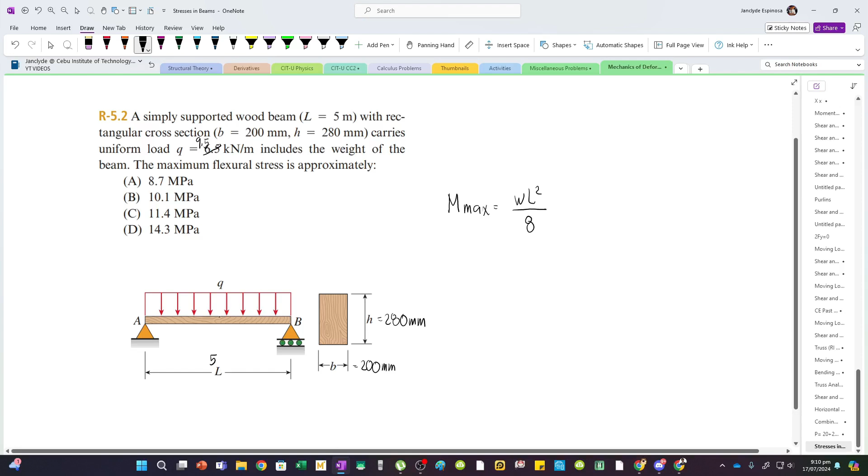And then our beam section is 200 and this is 280, and the length is 5 meters. So let's apply the formula.

For the maximum flexural stress or bending stress, we have MC over I, where C is the farthest distance from the neutral axis. So therefore we have FB equals, our W is 9.5 kN per m.

So 9.5 kN per m, multiplied by L squared, which is 5 meters squared, divided by 8. This is in meters. Now notice that the m units cancel, and we are left with kN multiplied by meter. So we have to convert that into Newton mm to keep the units consistent.

And then our C will be the farthest distance from the neutral axis to the outermost fiber. So we have this distance, this is the neutral axis. So this is half of 280, which becomes 140.

So 140, divide that by I, which is BH cubed over 12 for rectangular sections. So 200 times 280 cubed, divide that by 12.

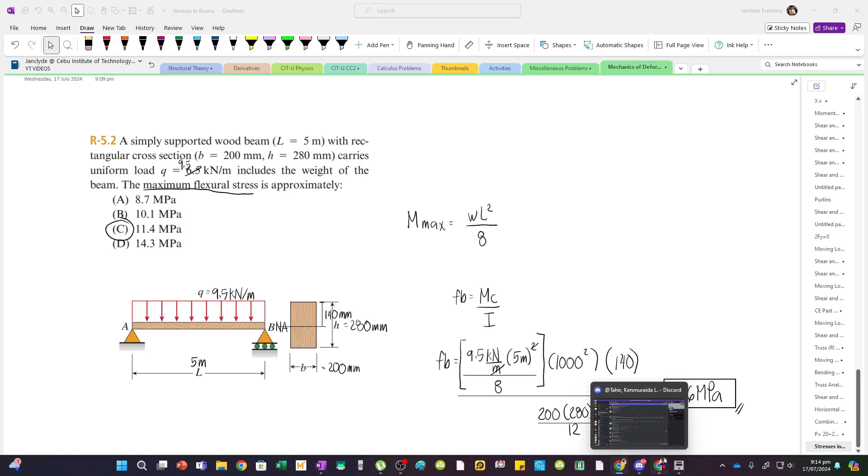Let's use this one instead. Let's copy this. This is the question, and then the figure is this.

So we have a beam, and we also have the beam section. Let's copy that, and also the section. Beam section.

Now in this problem, we have a beam with an overhang loaded by a uniform load of 3 kN per meter. Moment of inertia, good thing it was given so we don't have to solve it: 3.36 times 10 to the 6. And distances to top and bottom of the beam cross-section are 20 mm and 66.4 mm. The centroid of the figure was also given.

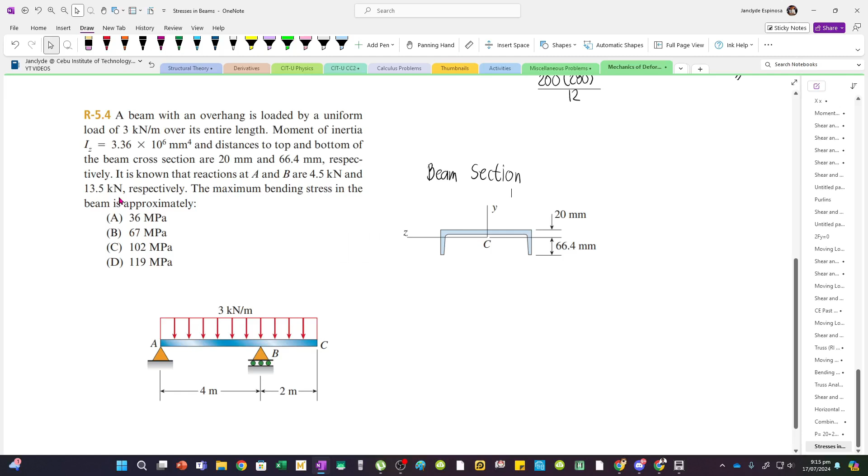And then it is known that the reactions at A and B are 4.5 and 13.5. Good thing that was given too, so it's easy to solve for the shear and bending moments.

So this is the reaction at A, which is 4.5 kN, and then the reaction at B is 13.5. That's convenient too.

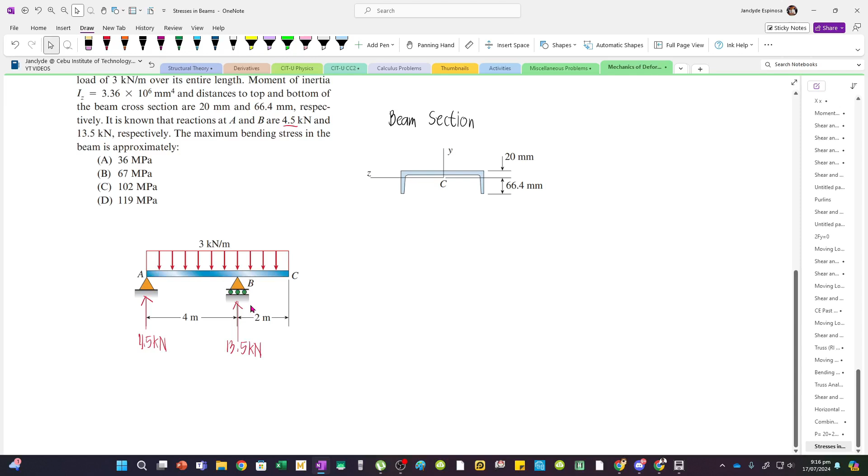Now for the maximum bending stress, you have to be careful because our beam is an overhanging beam, meaning we have a maximum positive moment and also a maximum negative moment. Now let's check that.

So let's draw the shear diagram and moment diagram. For the shear diagram, the units are in kN. So let's draw our zero line, and then from 0, we go up by 4.5. Straight line since this is a concentrated load.

So 4.5. Since there's a concentrated load, we have left and right shear values. This is 0, and VAR is 4.5. And then at point B, there's also a concentrated load of 13.5. So we have VBL and VBR.

Now the left shear value is the previous shear value minus the uniform load spanning A to B. The resultant is, right, 3, that weight, multiplied by 4, which becomes 12.

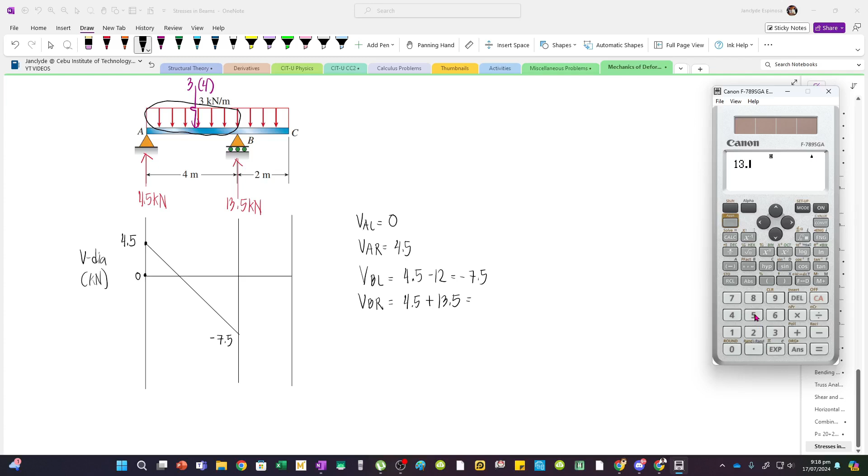What's this, this is VBR. Wait. And for VBR, we add the 13.5 there. So this is now, minus 7.5, sorry, 7.5.

So we have 6, from negative 7.5 we go up to 6. For point C, there's no concentrated load, so we only have one shear value, which is 6, the previous value, minus the resultant of the remaining load. That load has a resultant of 3, the weight multiplied by 2 meters.

So 6 minus 6, it now becomes 0. So it goes down, and we have a straight line because this is negative constant, plus 1 degree. So 1 degree here too, so it becomes 0 here.

Now you don't need to draw the moment diagram. Let's just try to solve the maximum moments just by looking at the figure. At this point, the shear becomes 0, meaning there's a maximum moment there. But also at this point, the diagram crosses the 0 line, meaning there's also a maximum moment there. So let's check that.

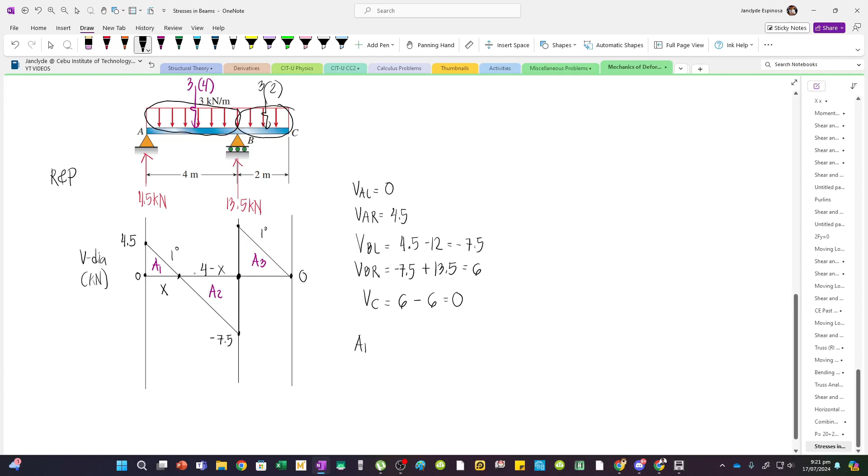So let's label this as area 1, area 2, and area 3. What is area 1? First we have to solve the base of this triangle, which we can solve by ratio and proportion. So this is x, and this is 4 minus x. By ratio and proportion, we have 4.5 is to x equals 7.5 is to 4 minus x.

So let's solve. Equals 7.5 over 4 minus x. So we get 1.5. So if this is 1.5, then this distance is 4 minus 1.5, which is 2.5 meters.

So A1, this is the maximum positive moment. A1 is 1/2 times base of 1.5 multiplied by a height of 4.5. So this is now 0.5 times 1.5 times 4.5, which gives us 3.375 kN-meter.

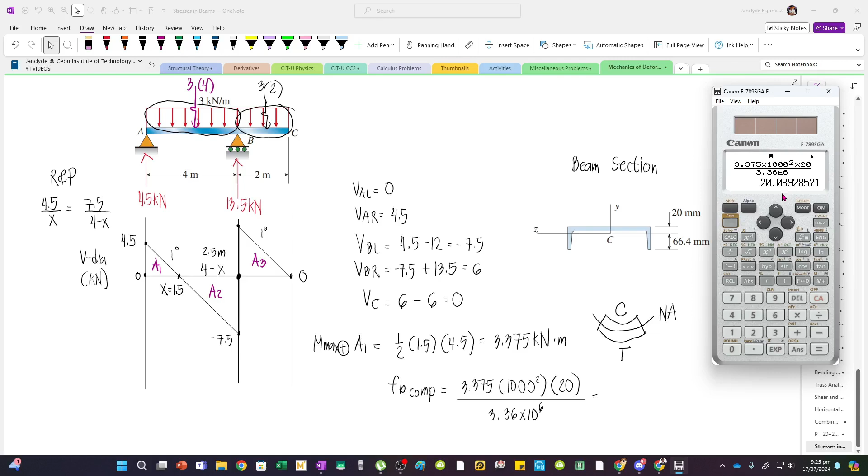Now if I weren't given, you would have to solve it yourself. So let's input that: 3.375 times 1,000 squared times 20 over 3.36, just press EXP. There, the E shows up, meaning that's already times 10, so just pair it with the exponent, 6. That's the 3.36 times 10 to the 6. So press equals, we have 20.089, or let's say 20.1 MPa. Now this is only the first bending stress.

We also have tension, FB tension. Now I can just copy this since only the farthest distance from the neutral axis for the tension side changes. Now tension is at the bottom, so I have to use 66.4 instead, replacing the 20 with 66.4. So solving the maximum bending stress for the tension side, considering the maximum positive moment, we have 66.696, or let's just say it becomes 67.

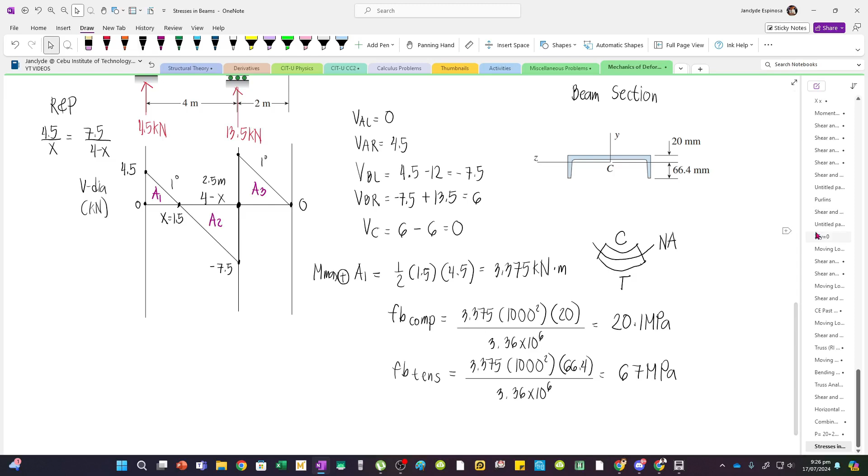So check the choices, there's 67. But you have to be careful here, because this choice is the trap choice, meant to scam you. Why? Aside from the positive maximum moment, there's also a negative maximum moment. Now where do you find that? Whenever you have an overhanging beam with only downward loads, you get a maximum negative moment occurring at the support. But we can check that here.

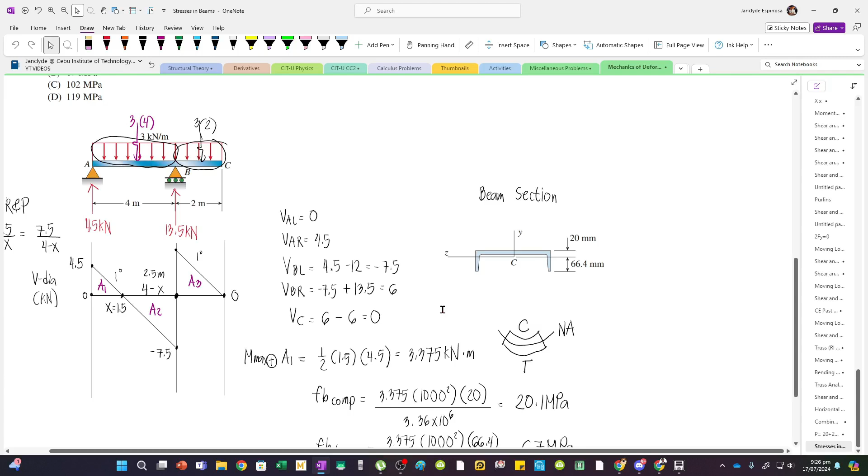There are two ways to solve the maximum negative moment. The first way: let's label this Mmax negative. You can add A1 and A2, since it zeroes out there, so you can use A1 minus A2. A1 is 3.375. Minus A2, which is 1/2 times base of 2.5 multiplied by a height of 7.5. This gives us minus 0.5 times 2.5 times 7.5, which gives us negative 6. This is your first and conventional option.

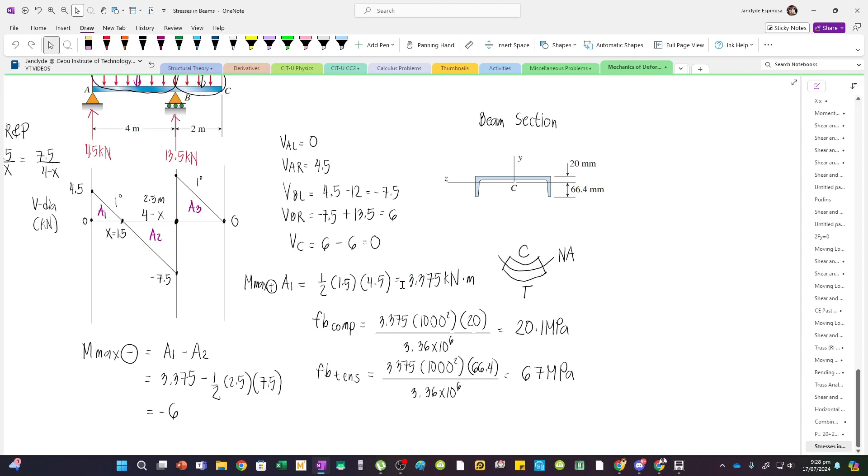But you can also take the area from the right. If you go from the right, the conventions change: a positive area becomes negative, and a negative area becomes positive. So how does that work? I can actually start from the right here, and go to the point where the shear becomes zero. So I can just solve this area. I have here the maximum negative moment, just the area A3. But since that's a positive area, it becomes negative if taken from the right. So let's set it up from the right.

This is now 1/2 times, yung base is 2 meters. Height is 6, yan kanina. So, magka-cancel yung 2. We have a value of 6 kN·m. But this is negative kasi again, there is a change in the convention.

So copy na lang natin yan. The same lang naman yung I. But take note, for negative bending, ito na yung itsura. Sad face na yung beam. And then ito yung neutral axis. Now looking at this figure, the bottom part, yung arc niya, shortened, while the top part, lengthened. Ibig sabihin, this is compression, and then this is tension.

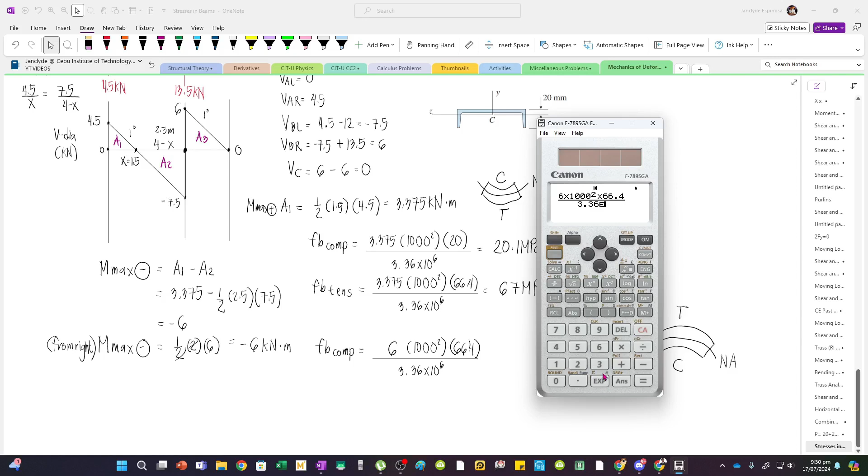And so, for the compression side, I have to use 66.4 na, medyo mag-iiba, this one for the compression side. But magbabago na yung moment value, magiging 6 na. So computing FB comp, or the compressive bending stress, we have 6 times 1,000 squared times 66.4, divide natin yan by 3.36 times 10 to the 6. So this is 118.57.

Yan, now check natin sa choices. Sa choices, merong 119. Now it's safe to say na ito na yung sagot. Bakit? Yung ibang values kasi sa choices are lesser than 119. Now yung nakuha mo is 118.57, which is tumugma dito. So you don't need to solve the other stress kasi alam mo na, ito na yung maximum, kasi yung ibang values sa choices, di na yan lalagpas ng 119.

But for the purpose of a holistic discussion, solve na lang din natin yung FB for the tension side. Copy ko lang yan, but my C will change, kasi for the tension side, it's at the top. So yung 20 yung gagamitin ko. Multiply natin yan by 20. This is 35.71.

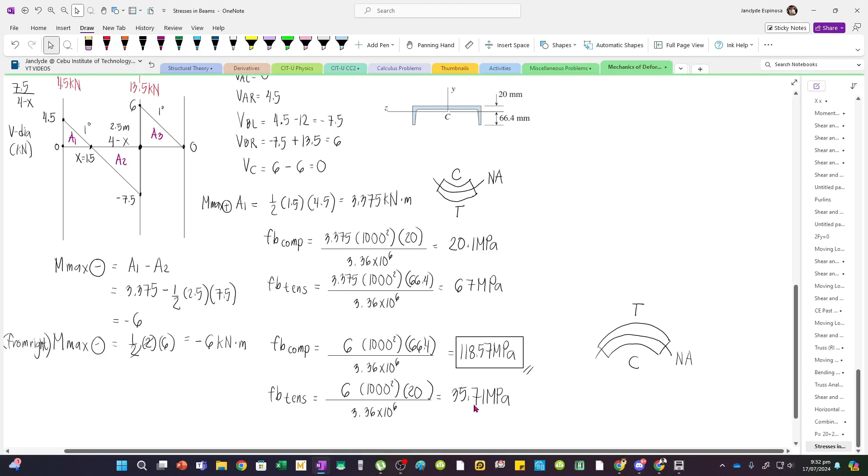And so, out of all the possibilities, ito yung pinakamalaki, so choose this one. So our answer pala is letter D. Now kung titingnan mo, yung 67 andyan sa choices, yung 35.71 pwede mo yung i-round up maging 36, andyan din yan sa choices. So dyan ka dapat careful talaga.

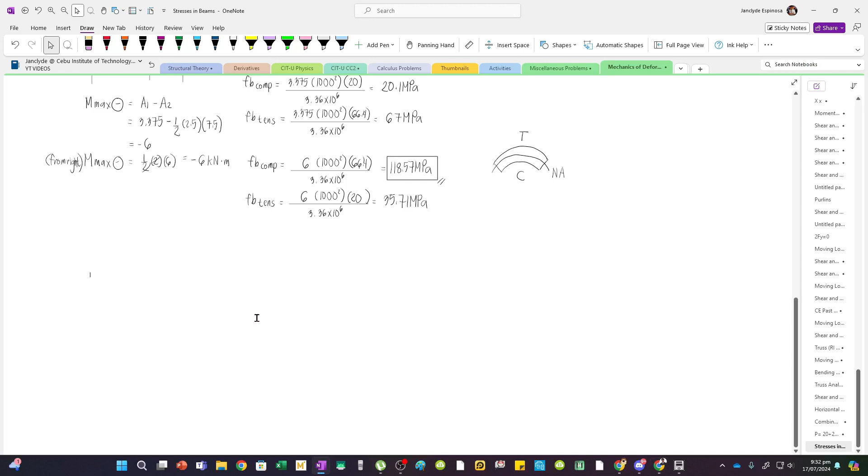Di ko makakon. Timing sir, bakay wasa. So now we have this problem naman. We have a cantilever wood pole. It carries a force P, 300 newtons at the free end. But aside from the force P, it also carries its own weight. And then we are given the unit weight, 6 kN per m cube. The length of the pole is 0.75 meters and the allowable bending stress is 14 MPa.

Now medyo mahirap tong mga Lodi. Bakit? Meron kasing density, kailangan natin yung i-account. So what happens here is, di ba, we are given gamma or the unit weight which is 6 kN per m cube. Now ano yung i-multiply ko sa kN per m cube para maging uniform load yan? Diba, I can multiply this by the area, kasi kN per m cube, multiply natin yung m squared, magka-cancel yung 3, saka ito rin.

So now it will be kN per m, kN per m na yung unit. So the question is, ano yung area? We have daw a circular cross-section. Therefore, the area pala, or sabihin natin weight, di ba, gamma times cross-sectional area, this is 6 kN per m cubed multiplied by pi d squared divided by 4. Ano kasi? We are trying to solve d kasi, required diameter, this is actually unknown.

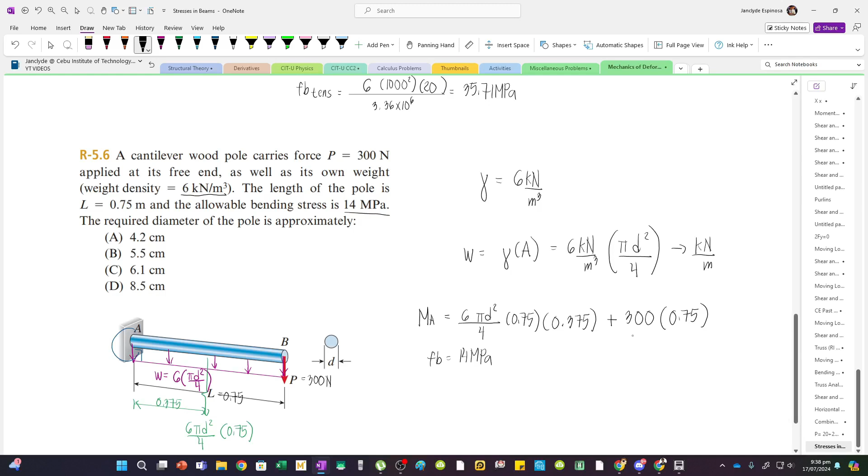Now let's input this. We have an allowable stress of FB equals 14 MPa. So therefore, using FB equals MC over I, we have 14 equals... let's copy the M, this is the expression for M. Now the C will just be the radius of the circular section, because the neutral axis is here, so the farthest distance from the outermost fiber going to the neutral axis - that's the radius.

Now what is the radius in terms of the diameter? That's just d over 2. And then I divide that by, what's the I of a circular section? It's pi over 64 d to the fourth. But here you have to be careful with your units. What is 14? That's MPa, which is equivalent to Newton per mm squared.

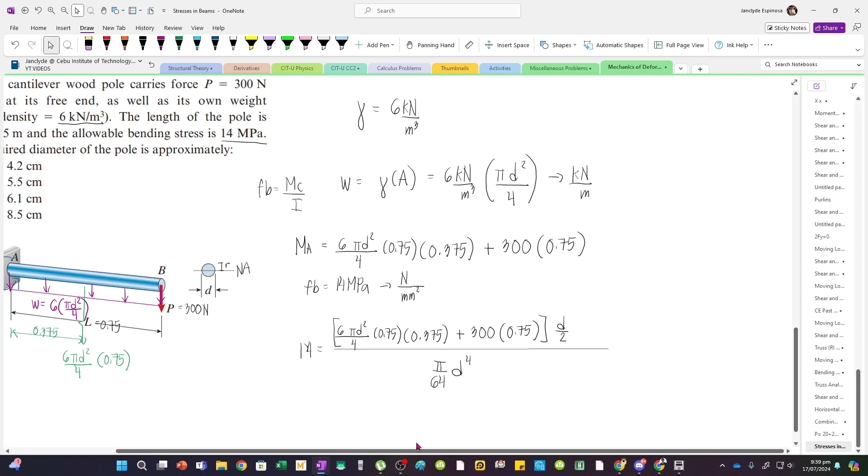But our density is in kN, and our area, since it's in m cubed, the area is also in m squared. This means we have to convert Newton per mm squared into kN per m squared to make all the units consistent. But the diameter that comes out will be in meters. So here's the conversion: first we convert Newtons - 1,000 Newtons is 1 kN, and 1,000 mm is 1 meter, and since it's squared, you also have to square this.

Let's try to input this in our calculators. But also, the 300 Newtons, the force, is still in Newtons, so you have to convert that too - divide by 1,000, so 300 over 1,000 to become kN, times 0.75. Now if you input this in the calculator, you'll find that it doesn't fit. So what can we do? We can actually cancel - this becomes 1,000 squared because we're squaring this expression, so that cancels out. For this side, we only have 14 times 1,000.

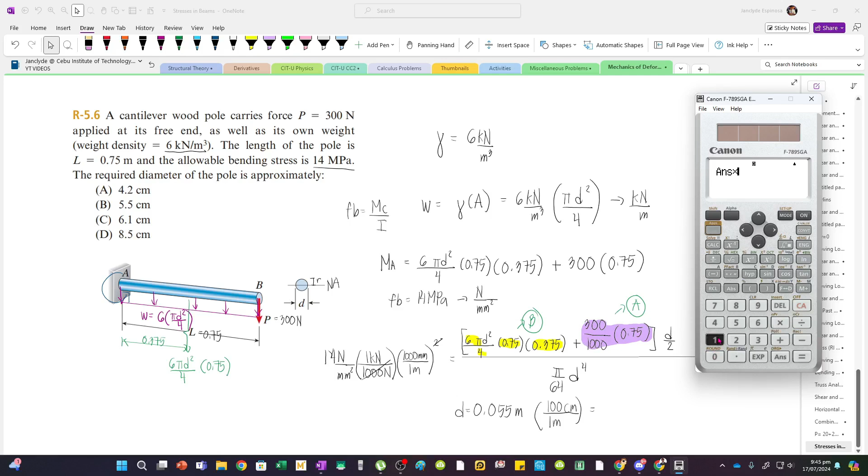But the question requires the answer in cm, based on the choices. So to convert this into cm, for every 1 meter there are 100 cm, so we multiply that by 100. Answer times 100, we get a value of 5.5 - 5.5 cm. So therefore our answer is letter B.

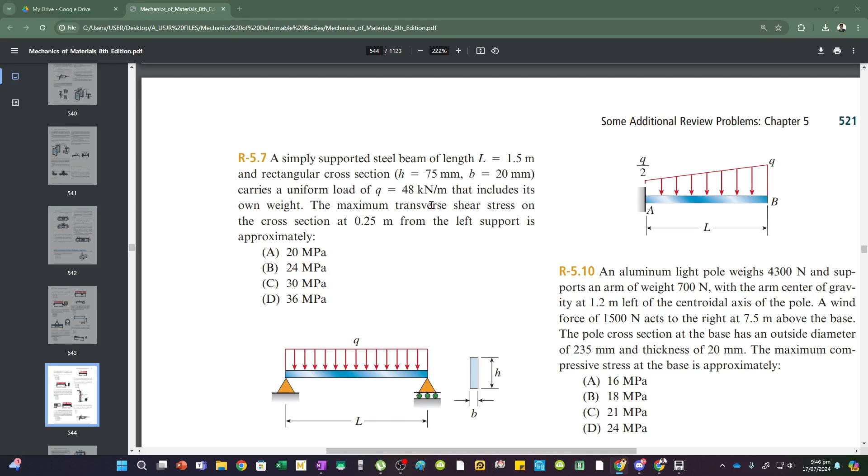Let's start with this simpler one. Here we are asked for the maximum transverse shear stress - this refers to the horizontal shear stress. So we have a simply supported steel beam of length 1.5 meters, and Q is 48 kN per meter.

H is 75 mm, and then B is 20 mm. Now, the maximum transverse shear stress on the cross-section at 0.25 meters from the left support is ano raw?

So gagawin natin dito is we have to first solve the reactions. Madali lang yung reactions kasi symmetrical yung beam natin and then yung loading din. Yung loading, meron niyang resultant which is equivalent to 48, the intensity of the load, multiplied by the length, 1.5. This is 72. So yung kinikarry pala dito ng support at A saka B would be half of 72, so this is 36 saka ito rin.

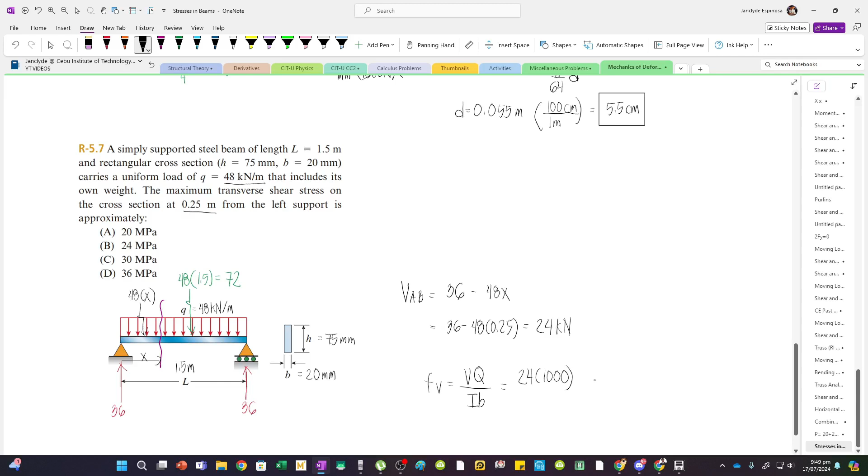Now yung Q is area moment. So di ba, we have a neutral axis dito. Ito yung neutral axis. And then since maximum yung tanong, we start from the neutral axis going to the outermost fiber, so we have to consider this area. Ano yung half ng 75? 37.5. Yan, 37.5 and this is 20.

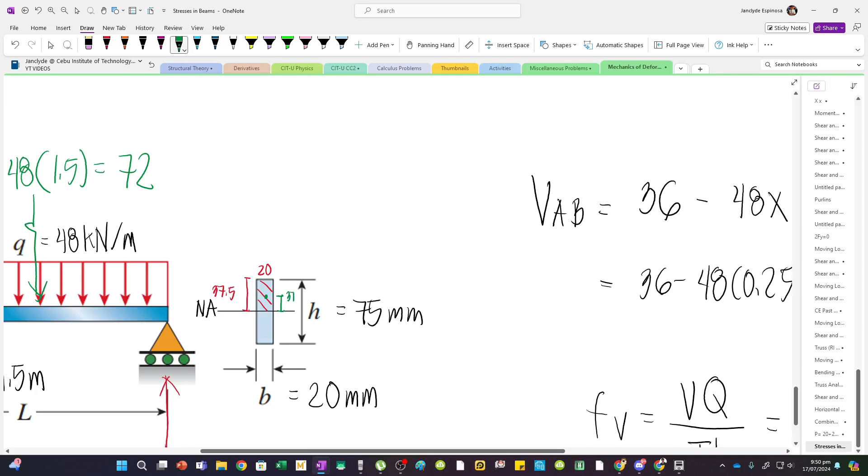So we have to consider this area pala. Bale yung Q ko is 37.5 times 20, multiply ko yan by the moment arm going to the neutral axis. Now yung centroid ng figure natin is nandito, and so this distance is half of 37.5. So multiply ko yan by 37.5 divided by 2.

And then yung I ko is di ba, BH cubed over 12. So 20 times 75 cubed divided by 12. Again, for I, in horizontal shear stresses, you have to consider the whole section, not just the area of interest. So kaya we are using 20 and yung whole height talaga 75.

Avoid using 37.5, yung area of interest mo, hindi yan yung I na gagamitin mo. And then the base is the base nearest to the neutral axis, yung base ng area of interest. So since this is only 20 for all strips, 20 yan. Yung pinakamalapit sa neutral axis is this point talaga, yung sagad sa neutral axis. So we have to use 20.

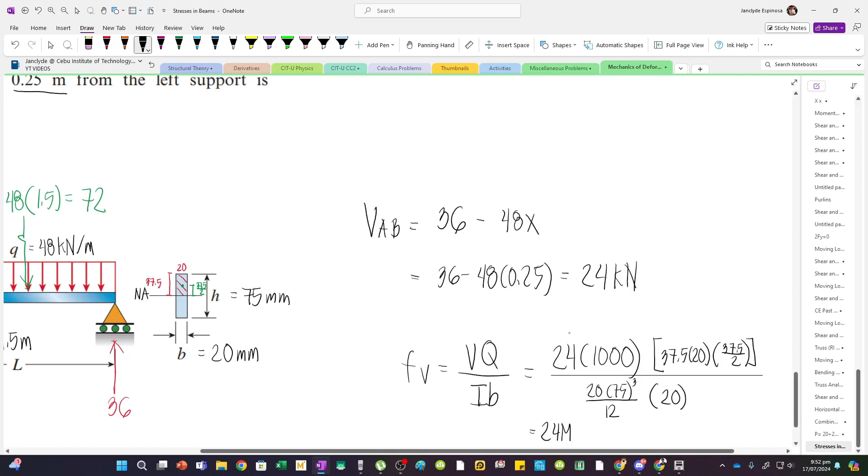So 24 times 1,000 times 37.5 times 20 times 37.5 over 2. Divide natin yan by 20 times 75 cubed over 12 times 20. So we have 24 MPa, which is letter B.

But if you are to apply the shortcut, di ba, for rectangular sections, we have 3V over 2A. Try natin: 3 times 24, multiply natin by 1,000, and then divide natin by 2 times the area of the cross-section. Yung area ng cross-section is 20 multiplied by 75. So this is 3 times 24,000 over 2 times 20 times 75. Same lang din, so this is also 24 MPa.

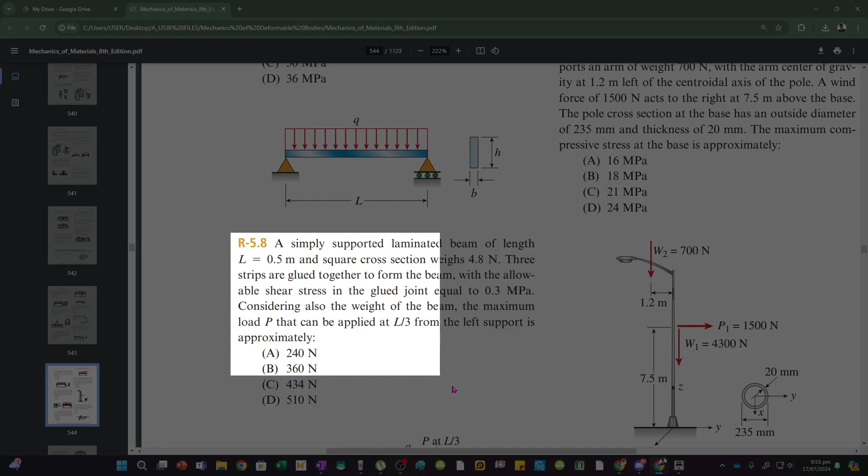So kaya advantageous talaga pag alam mo yung shortcut formulas. On to the next problem, copy muna natin.

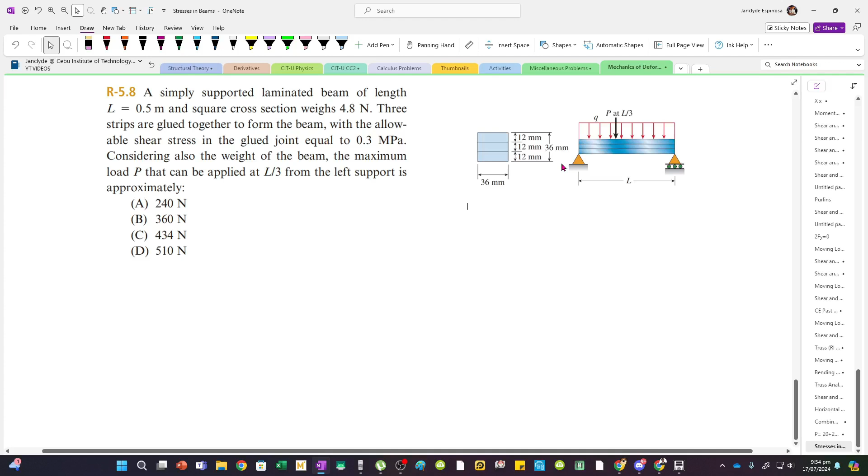So here we have now a simply supported beam of length 0.5 meters and a square cross-section weighing 4.8 newtons, ito yung total weight niya. Now, 3 strips are glued together to form the beam, with the allowable shear stress in the glue joint equal to 0.3 MPa. Considering also the weight of the beam, the maximum load P that can be applied at L/3 from the left support is ano raw approximately. So L natin is 0.5 meters, and then yung total weight daw ng beam, wag mo na yung don't consider Q na, kasi given ka na ng total weight which is 4.8 newtons. So meron daw siyang weight na 4.8 newtons.

Yan, so the question is ano daw yung load P that can be applied at L/3 given this shear stress? So lagay natin FV allowable for the glued joint. This is 0.3 MPa. Yan, so move natin.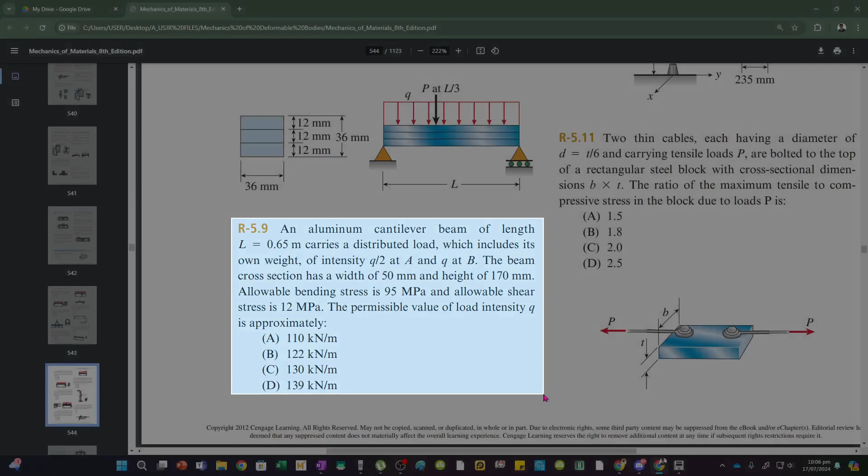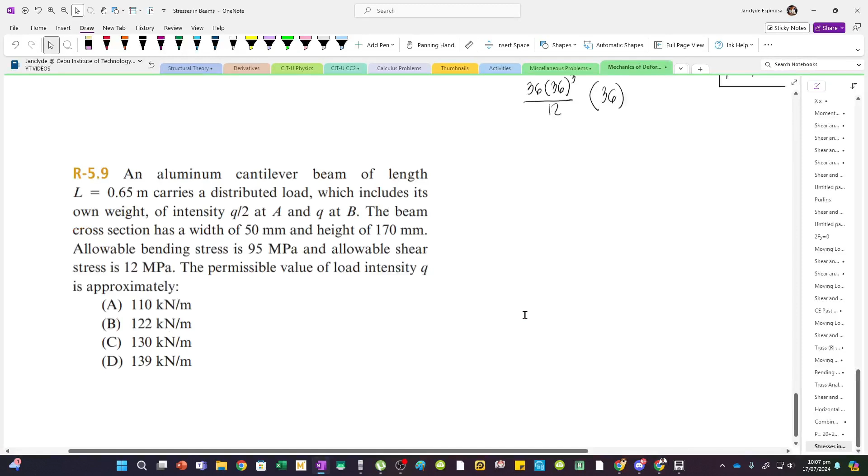And then we have a figure. We have the cantilever beam, length is 0.65, and the intensity of the loads is Q over 2, uniformly increasing to Q. The beam has a width of 50 and a height of 170. So our cross section is 50 and 170. Now the allowable bending stress FB equals 95 MPa.

And the allowable shear stress is 12 MPa. So what is the permissible value of Q? Now, since we have two conditions, we have a limitation for the bending stress and another limitation for the horizontal shear stress. Therefore we have two values of Q to solve. We'll just compare both and check which is the safer value. So that's what will happen.

First, let's check the FB. For the bending stress and the horizontal shear stress, the maximum moment and maximum shear will just occur at the fixed support. So we have AY there, and we also have MA. We also have AX theoretically, but there's no horizontal load, so that won't matter.

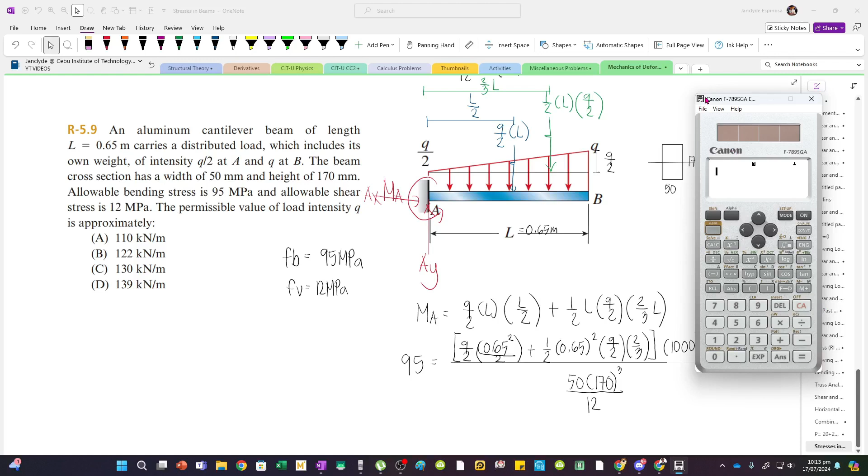95 equals Q over 2 — that's my unknown, so X over 2 — times 0.65 squared, divided by 2, plus 0.5 times 0.65 squared times Q over 2, so X over 2, times 2/3, times 1,000 squared, times 170 over 2.

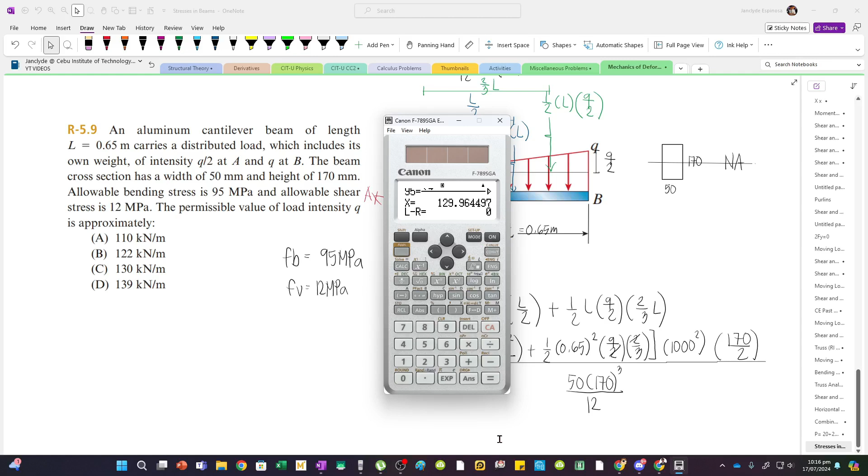Q equals 129.96 kN per M. But hindi pa ito yung sagot, kasi we still have to check considering the allowable shear stress.

So for the allowable shear stress, we are to use again VQ over IB. But since rectangular yung section natin, gamitan na lang natin ng 3V divided by 2A para madali. Yung AY, you can add the two areas, or you can just look at the initial figure and get the area of the trapezoid. Yung area ng trapezoid is the sum of the parallel sides, so Q over 2 plus Q.

Divide natin yan by 2 and then multiply natin by the length. Yung length is 0.65. So, ito na yung area ng trapezoid. Therefore, this is also the maximum shear.

Copy na lang natin yan. Over 2 times 0.65. Yung value ng shear, naka-kN dapat, but since this will by default solve it in newtons, multiply natin by 1,000, kasi yung 0.65 naka-meters yan, para kN/m na later yung lalabas.

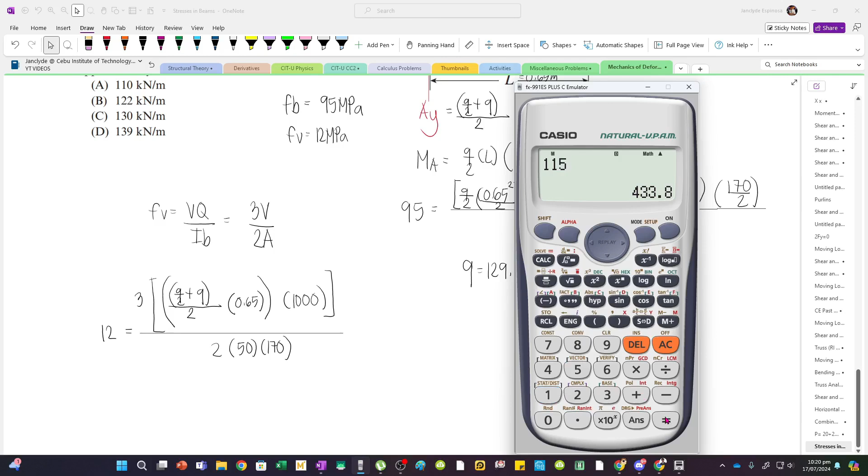Therefore, we have 12 equals 3 times Q over 2 plus Q, divide ko yan by 2, times 0.65, and then times 1,000 para parang naka-kN yan, kinonvert natin into newtons. And then 2 times 50 times 170. So solving Q, assume natin 115, then we have 139.49.

49 kN per M. Ngayon, diba yung dalawang values andyan sa choices. Yung 129.96 corresponds to 130, while for the horizontal shear stress, yung 139 corresponds to letter D. Pero yung tanong kasi is the permissible value of the load intensity. So ano yung safer dyan? Yung makakaya ng moment, bending stress, ay 129.96. But yung makakaya ng horizontal shear stress is 139.49. So para safe sa dalawang conditions, ito dapat yung piliin natin.

Yan. Therefore, the answer pala is letter C.

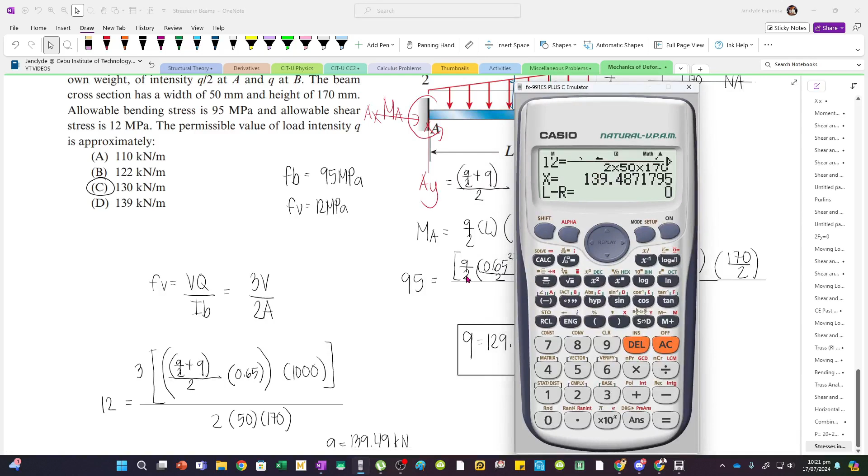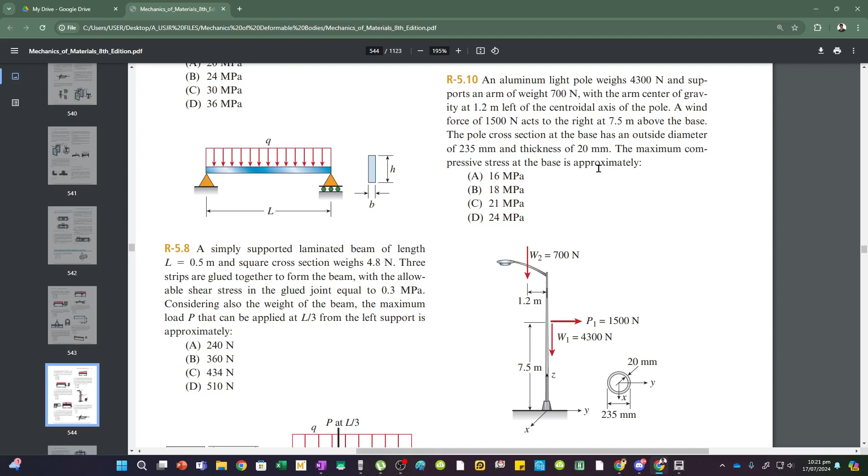So, ito na lang muna yung last problem dito sa book. At pagkatapos, didiscuss ko yung quiz kanina. Ito yung gusto na items ni Sir Digoma, kung galing kayo sa CIT. Combined stresses.

So, here we have daw an aluminum light pole na 4,300 newtons yung pole natin, so this is W1. It supports an arm with a weight of 700 newtons. Ito yung arm niya, arm. So it weighs 700 newtons.

Yung centroidal axis ng pole ay andito. So this is applied 1.2 meters from the centroid of the pole. And then, a wind force of 1,500 newtons acts to the right at 7.5 above the base. So yan yung load na yan caused by the wind. Bale, yung wind tumama sa pole natin, and then times 7.5 yan later.

The pole cross-section at the base has an outside diameter of 235 mm and a thickness of 20 mm. Ngayon, dito usually nagkakamali yung students. Pag merong outside diameter, tas merong thickness na binigay, yung way nila to solve the inner diameter is just to subtract the 2, bale 235 minus 20, which is mali, kasi dalawang thickness kasi yung...

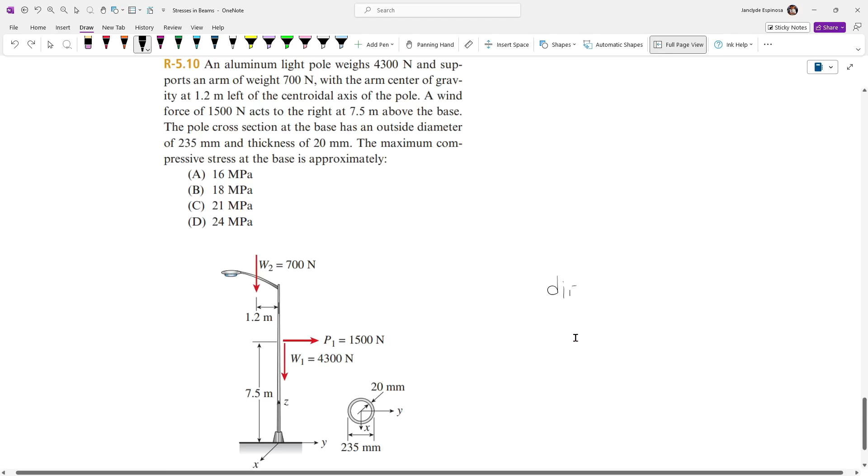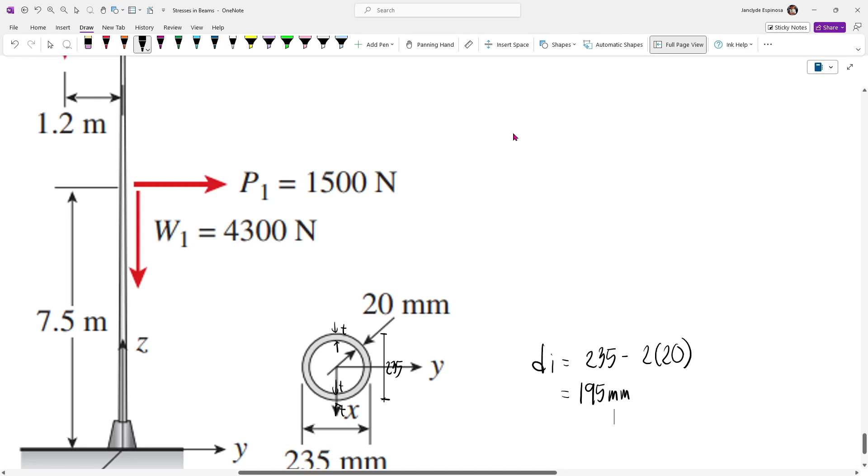Andito, zoom tayo. Diba, ito yung thickness, thickness yan, but thickness din to. Ibig sabihin, to solve the inner diameter pala, we have 235 minus natin yung dalawang thickness. So yung inner diameter is 235 minus 2 times 20. So this is now 195, naka-mm yan. So 195 mm. And then, meron na tayong value para sa section natin.

Check natin yung stresses na mangyayari. Let's first look at the vertical forces. Yung vertical forces, yan yung andito. We actually have a reaction here. Sabihin natin, V equals 700 plus 4,300. Yan, or ano pala, this is perpendicular to the section, so ano na lang, P.

So this gives us 5,000. Yan. So I have here, this causes a compressive stress perpendicular to the cross-section. So parang axial stress yung mabubuo. So I have here...

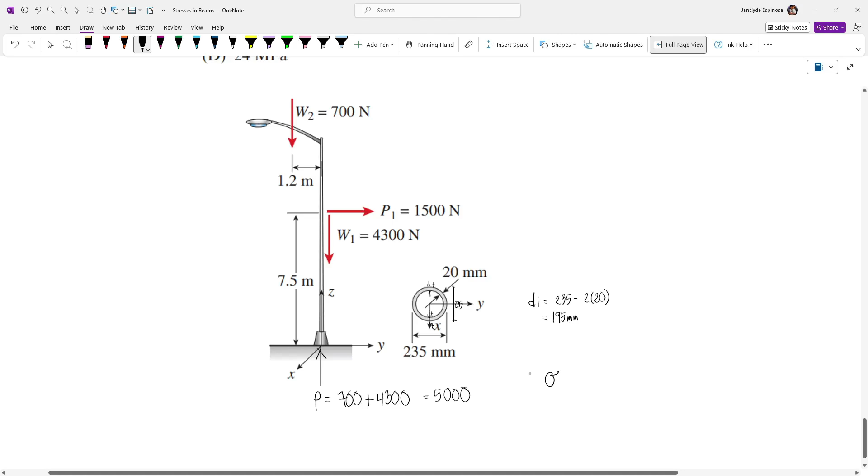Yung tanong kasi is the maximum compressive stress. Ngayon, these two forces are toward the body. Ito rin, toward the body. So meron akong compressive stress due to an axial load. So we have 5,000 newtons, divide natin by the area of the cross-section, bale pi over 4 times the outside diameter square natin, minus the inside diameter, square din natin. Yan, now this is still the first compressive force. Ngayon, sir, ano yung ibang compressive force na mag-a-act sa natin?

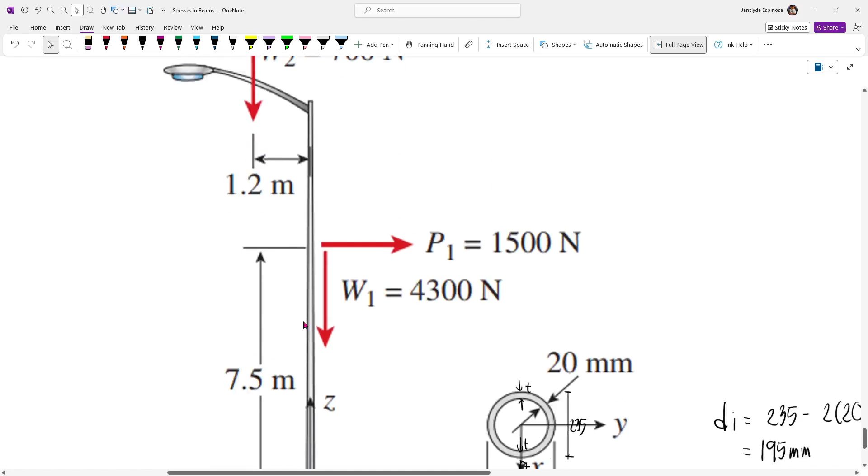Notice that if we apply this load, yung 700 Newtons, ano yung bending na mako-cause niya dito about the base of the pole? This will cause a counterclockwise rotation, ibig sabihin pag ganito yung bending ng beam, caused by the 700 Newton load. Now if this is the bending, saan yung compression dyan? Diba this describes, if i-rotate natin, this describes a negative bending where ito yung compression, and then ito yung tension side.

So yan yung i-analyze natin. Compressive side is andito sa left side. Compression, this is tension, while for this one, compression is here, tension is yung sa P1 naman, ito yung bending niya na mako-cause.

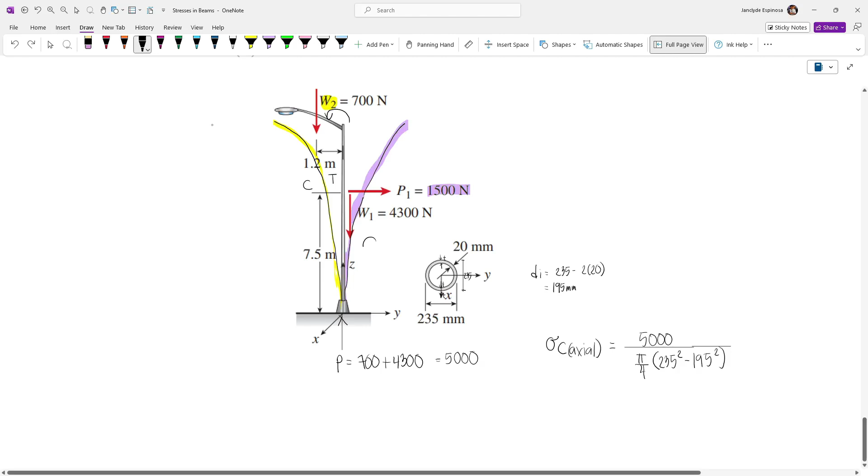So ano yung compression side dyan? Yung compression side naman dito, for this bending, andito sa right side. And then this is the tension side. Now check natin ano yung mas malaki na moment.

Let's first get the moment caused by W2. We have here 700 Newtons multiplied by 1.2 meters. So this is ano yan? 700 times 1.2, this is 840 Newton meter. Now how about the moment caused by P1?

The moment caused by P1 is 1,500 multiplied by this moment arm, bale 7.5. So we have here 1,500 times 7.5, this is 11,250. So try to notice, mas malaki yung moment na to compared sa moment ng W2.

So this will actually govern, yan yung compression na I will consider, kasi yung compression dito, compressive stress is maliit lang. But you have to take note that one of these forces, if you'll consider one side, for example this side, di ba tutugma yan sa tension side ng W2. So ibig sabihin ano yung gagawin natin? For the total compressive stress, copy natin to.

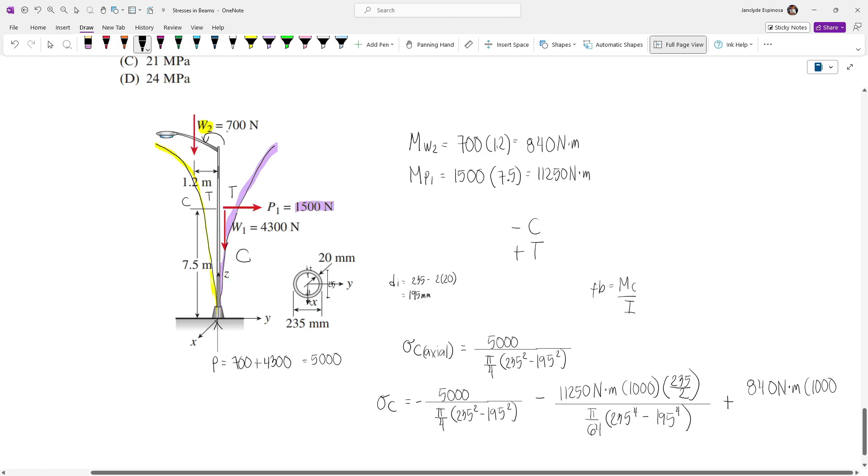Yan, so ito yung compression side, but for the 700 Newton load, tension side yung nasa right. Now dapat tutugma yung stresses ko. Therefore tension pala yung makukause ng W2. So I have here 840 Newton meter times 1,000 ulit, and then times, ano pa rin? 235 divided by 2, and then still the same yung moment of inertia.

So a technique to make this fit in your calculator is, diba, common yung terms na yan. Yang I common, saka ito rin, na bale ito na lang pati yung conversion factor. So the way I would type this sa calculator is paganto. I have, zoom natin onte, I have negative 5,000 divided by pi over 4 times 235 squared.

Minus 195 squared. Yan. Again, itong dalawang to, these are caused by bending stresses, while this is axial. So gagawin ko is factor out ko yung ano dito, yung constants. So I have plus.

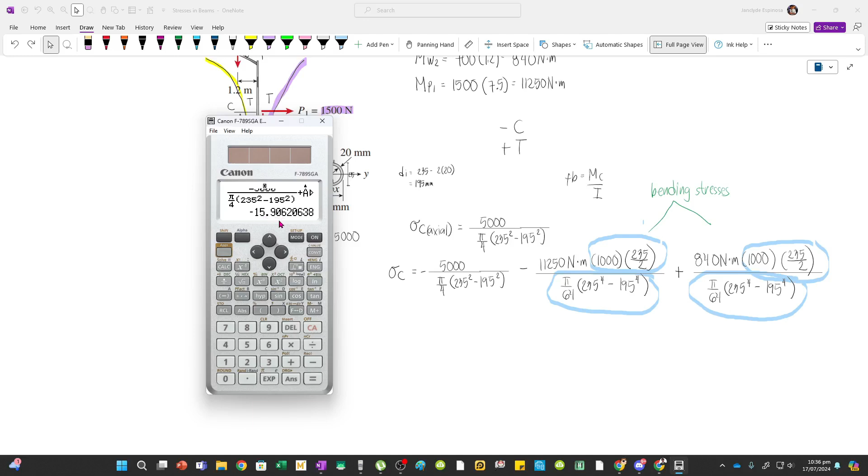So compressive stress is minus 15.91 MPa. So check natin sa choices, we have 16. Yan, so letter A pala yung sagot natin.

So ito lang yung mahirap, yung pag-identify kung anong bending stress yung makakause ng isang force or isang moment pala.

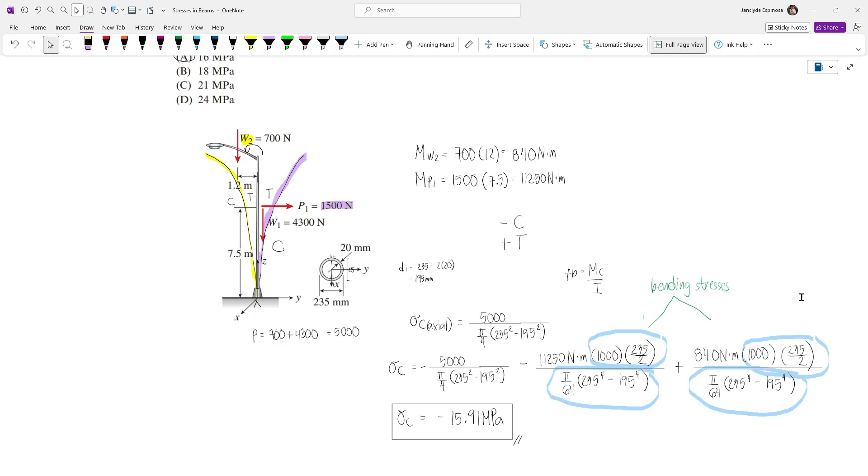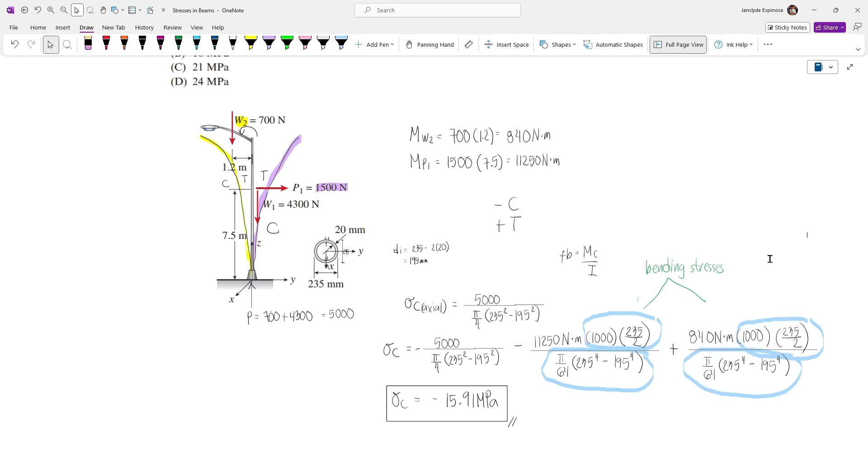You can solve the moment reaction at the base of the pole, which will cause a counterclockwise moment and then a clockwise moment. So that's what you'll use: minus 11250 plus 840 will be your moment. I divided this into 2 because this is helpful when solving pre-stressed concrete problems, since with pre-stressing, the compression and tension side differ compared to the actual loading.

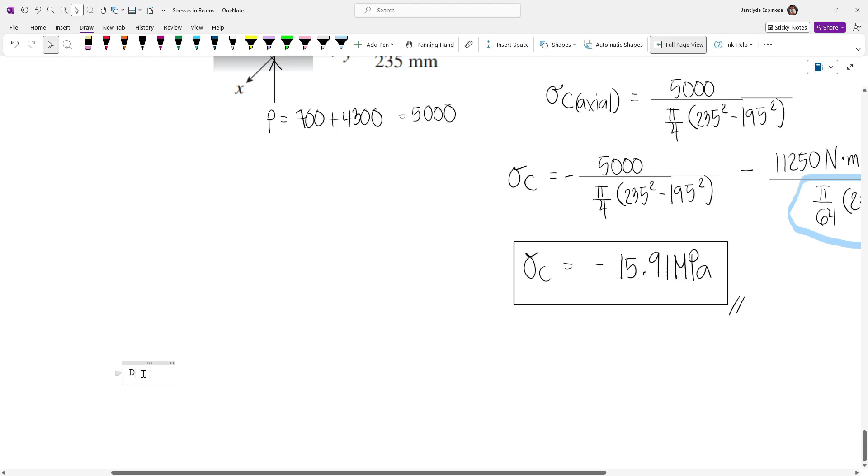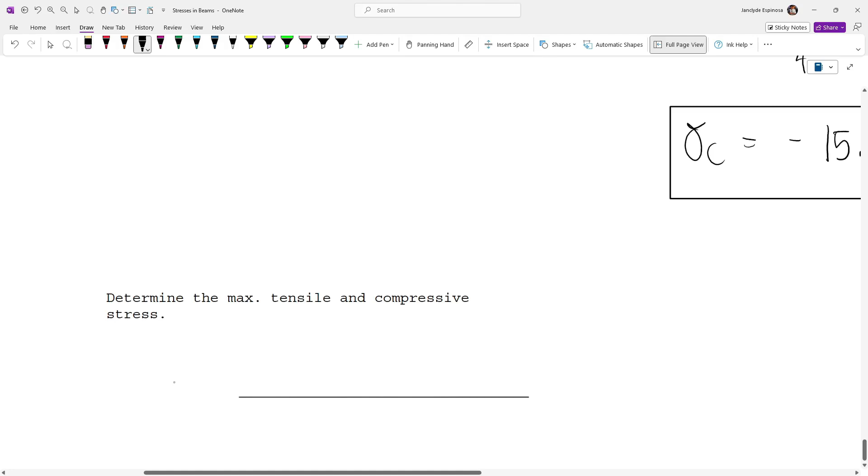I won't discuss moving loads since that's easy. Let's just consider the bending stresses and tensile stresses. So for our quiz: determine the max tensile and compressive stress. We have a beam with a length of 6 meters, a roller support, and a uniform load of 4 kN per meter. Our section is an irregular section.

It looks like this. This is 75 mm, this was 20, we have 50, and then this is 25.

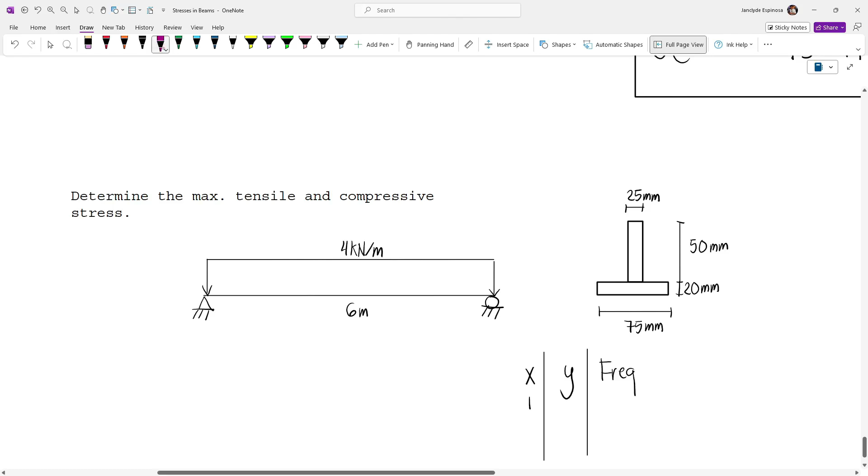To solve the moment of inertia for this, let's use the calculator technique I taught. So we have x, y, and frequency. For all x values, just input 1 - we have 2 areas, so let's say this is area 1, this is area 2. There's the centroid of the first figure - this is my reference axis. I have to measure all y distances from this reference axis. This distance is 10 mm from the reference axis, and the second shape has a centroid here.

So that distance is half of 50, which is 25, plus 20 equals 45. So I have area 1 and area 2 - again, all 1 for column X. For Y, we use 10 for the first area and 45 for the second area. Y corresponds to the distances, while frequency corresponds to the areas. For the area, we have 75 times 20 for the first shape, and 50 times 25 for the second shape. To calculate the moment of inertia, we use the summation of y squared minus n times y-bar squared.

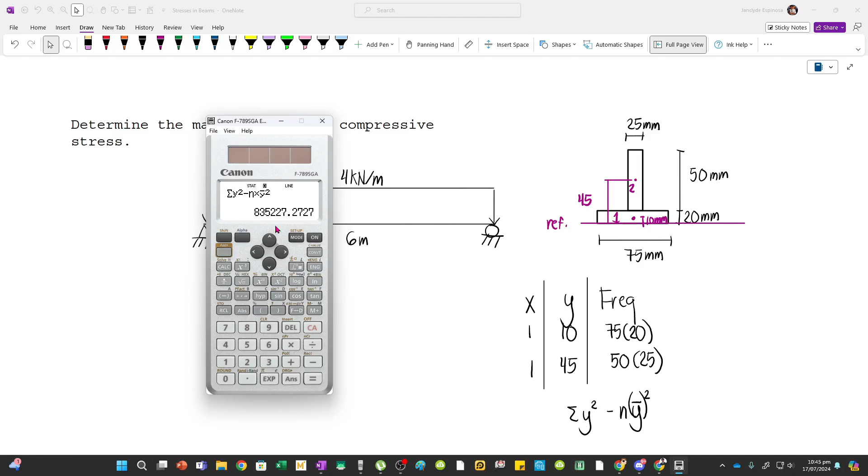Now let's square that - press equals. This is our moment of inertia. What's this? This is still Ad squared, the transfer formula, the total. So this is... 835,227.2727. Let me store that in A.

After doing this, I still have to add to get Ix, since our bending is about x. What will happen is the individual moments of inertia of our different shapes: 75 times 20 cubed over 12 for the first shape, plus for the second shape we have a base of 25 times a height of 50 cubed, divided by 12, plus the transfer formula - this accounts for all the shapes. So let's type it.

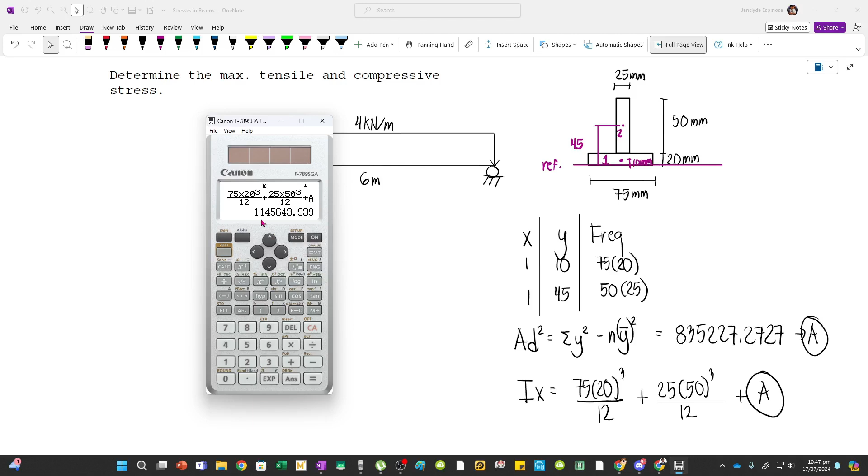Mode, and let's go back here: 75 times 20 cubed over 12, plus 25 times 50 cubed still divided by 12, and then plus A. So that's our moment of inertia: 1,145,643.939.

And then to the fourth. And then, what's our centroid? I haven't checked it, sorry, let's go back. Go to stat, linear. 1 and 1, 10 and 45, 75 times 20 and 50 times 25.

Press AC, go to apps, then go to bar Y. We have 25.91. So from the reference axis, bar Y equals 25.91. And then if this is 25.91, the remaining distance is 70 minus that value. So 70 minus 25.91, that's 44.09.

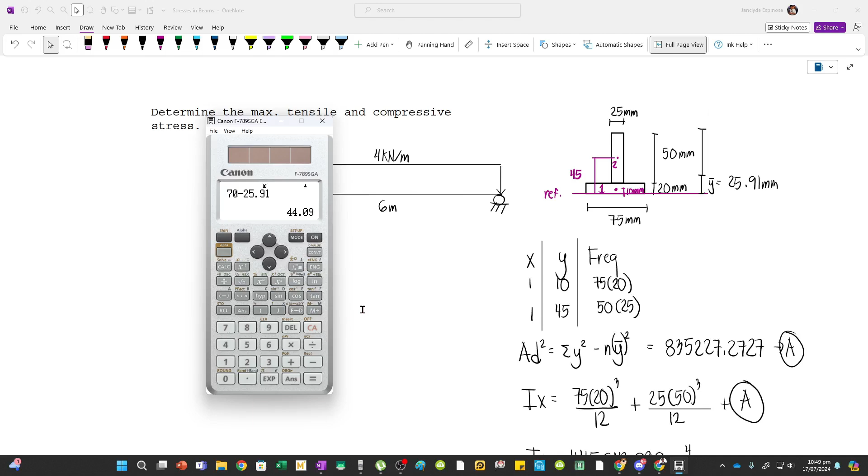Since we only have vertical loads, when bending is like this, that's positive bending, and this is the neutral axis. So for the compression side, this is compression, this is tension. For the compression side, I have to use 44.09, and for the tension side, I will use 25.91. So therefore, FB compression is, what's the maximum moment?

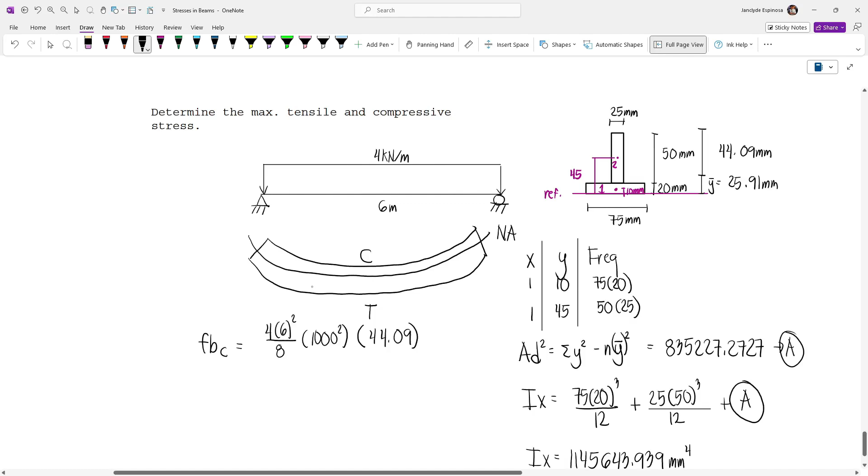We have a simply supported beam with a uniform load over the whole span, so just use WL squared over 8 directly. So 4 times 6 squared over 8, we have to convert this into Newton-mm, and then times C. The C for the compression side is 44.09. Now divide that by this value. So move on: 4 times 6 squared over 8 times 1000 squared times 44.09, divide by 1145643.939. So this is 692.73, unit is MPa.

And then for tension, it's the same, but the distance will change. The distance C will now be 25.91, because this is the tension side, below the neutral axis. Again this is the neutral axis, NA. So 25.91... this gives 407.1. This is the maximum tensile stress.

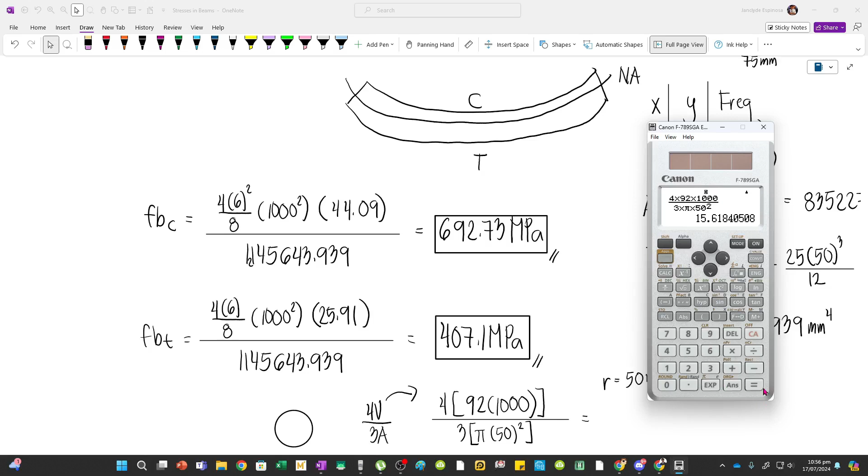For the other problem, horizontal shear stress, but the given section was circular. So for circular sections, just use 4V over 3A. And V there is 92, the maximum reaction. So 92 times 1000 is V, again multiply by 1000 to convert into Newtons. Many earlier forgot to convert the shear force. Then divide that by the area. The given earlier was radius 50mm, so just use pi r squared, pi times 50 squared, since radius is the given. Then multiply this by 3. So the answer earlier for maximum horizontal shear stress is 4 times 92 times 1000 divided by 3 times pi times 50 squared. So that's 15.62 MPa.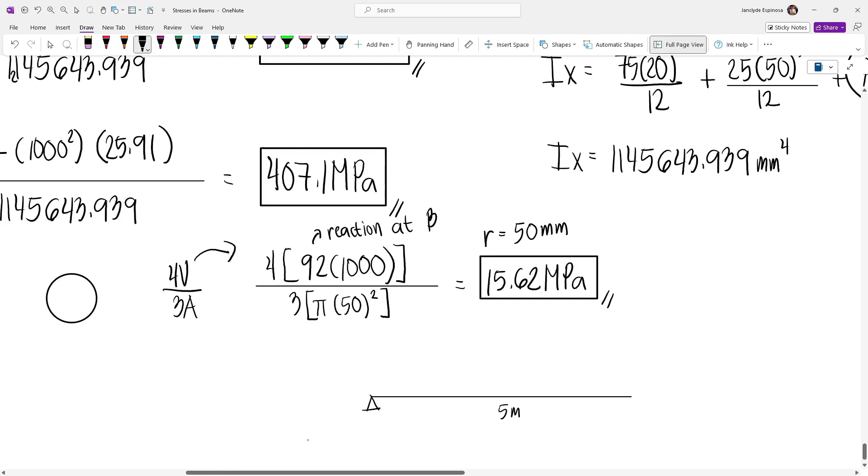The V there is this maximum shear, this is the reaction at B. Our figure is like this: 5 meters, simply supported, with a 50 kN load here and a distributed load of... what was it again? I forgot. 20 kN per meter. And this was 2 meters.

So just solve for the reaction here, because most likely that's where the maximum shear is, since the concentrated load and applied loads are close to the roller support. So just take moments about, let's say, A. So we have 20 times, this is 3 meters, so 20 times 3 times 1.5 plus 2, plus 50 times 5, minus CY times 5.

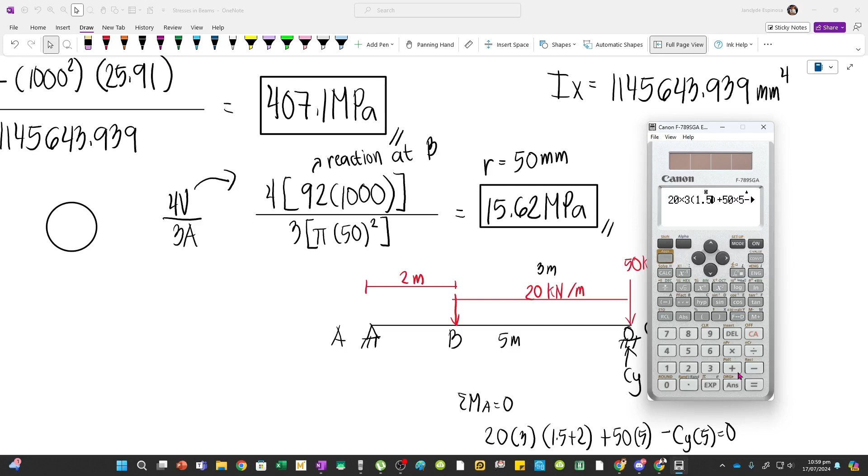So solving for CY: 20 times 3 plus 50 times 5 minus CY times 5 equals 0. Wait, why 62? Wait, 20 times 3 times 1.5, oh wait, times 1.5 plus 2, so 92. CY equals 92 kN, so this is your maximum shear force.

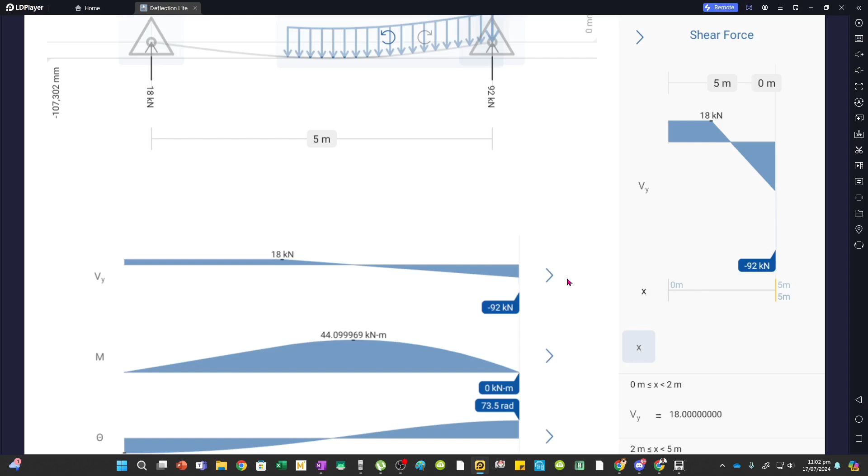So that's it for now, and this is recorded, so just review it.